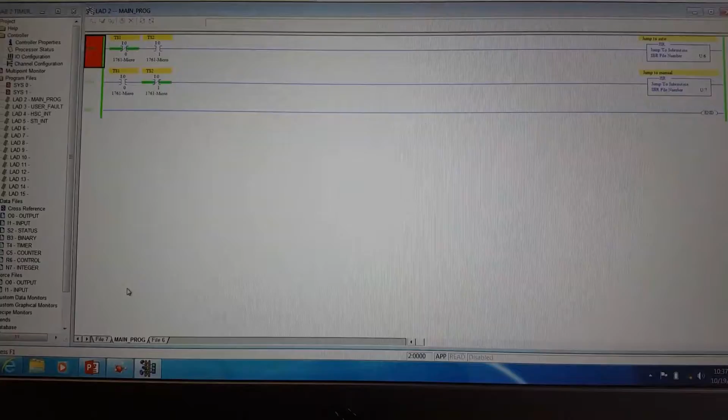So this is my program. This is the main file that basically, so there's two modes for this program. There's automatic mode and manual mode. And this file just tells the PLC which mode it should be operating in.

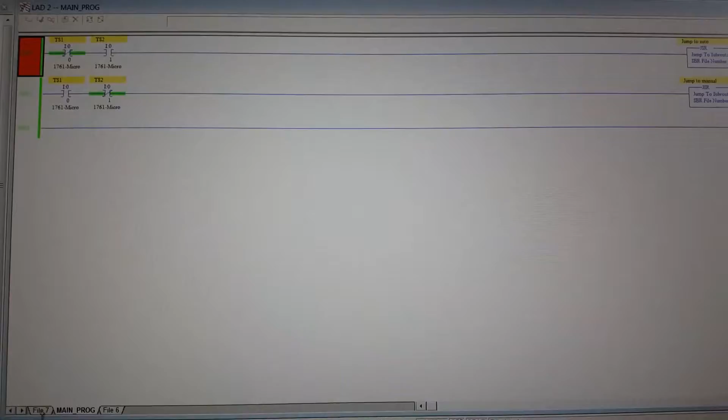So down here I have my tabs with my other two files, and this one is manual mode and this one is automatic mode. So when I go here and I turn on toggle switch 1, the program is going to automatically go into manual mode, and that means that when

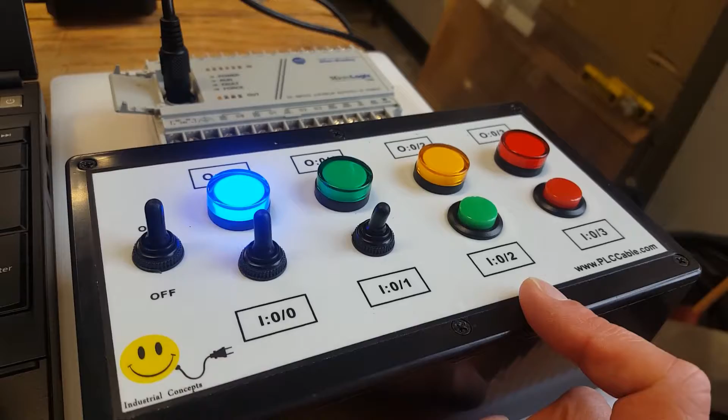the program is in manual mode, I have to push the green button for the light to advance to the next station. So this is simulating like a production line, and each light is a station on the line. So when I push the green button, it takes 5 seconds for the signal to travel to the next light.

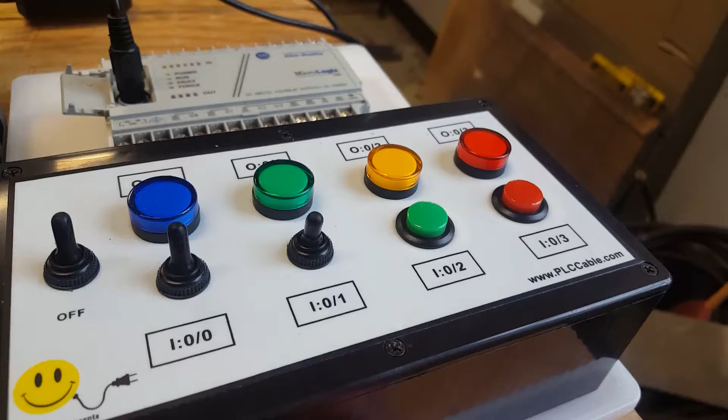And then I push it again, and it takes 5 seconds to go to the next one. And then I push it again, it takes 5 seconds to go to the last one. And when I push it again, it cycles back to the beginning. And it takes 5 seconds to go back to the blue light.

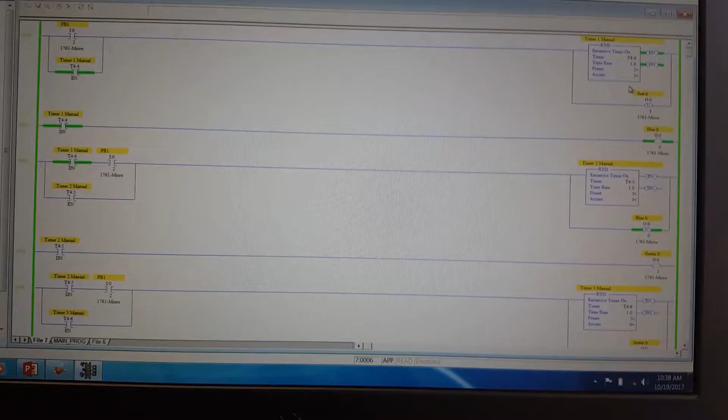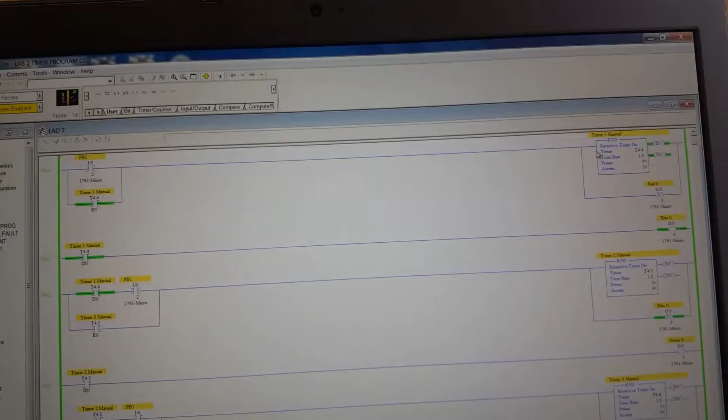So the way that this works is, here's my program here. I have timers, and each one is for 5 seconds, and each timer corresponds to one of the lights on my trainer. So for the first light, the only condition for it to come on is the push button, and that starts the first timer.

Now the reason it works with only the push button is because this is the first one, and it's not gonna reset to 0. So when I push the button each subsequent time, this timer will already have accumulated 5 seconds, so it won't go back to this one until I hit the button to turn off the red light, and that resets everything.

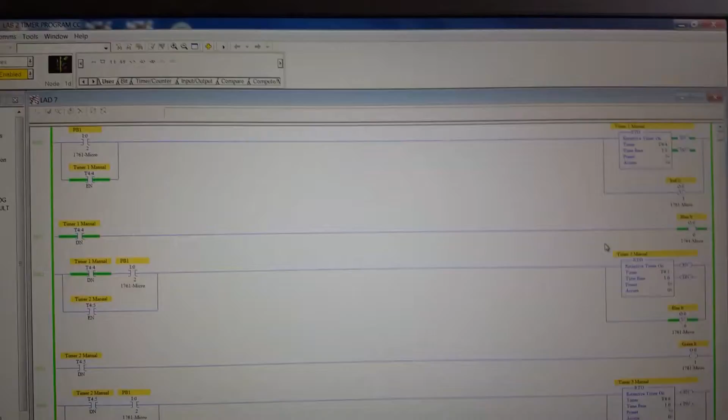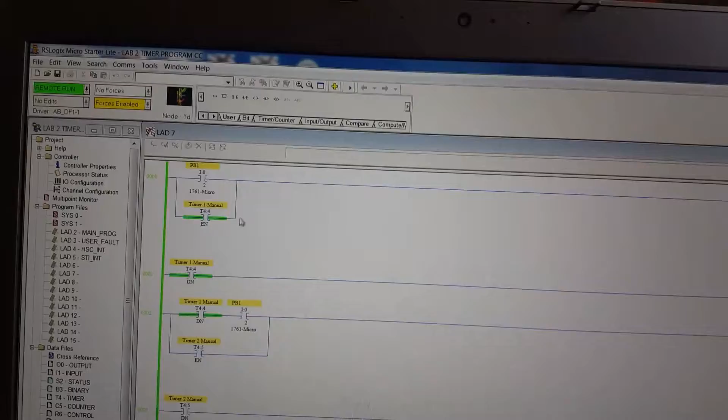So I have my push button 1, and the way that I keep this latched when I push the button, because I let go of the button almost immediately, but the timer keeps running, and that's because I'm using the timer as a latch. So once the timer is engaged, it latches itself on, and once it accumulates 5 seconds, it disengages, and this is no longer true. So that rung is no longer in operation.

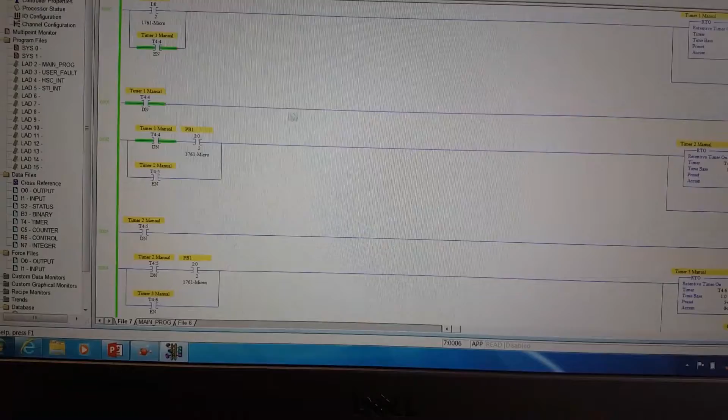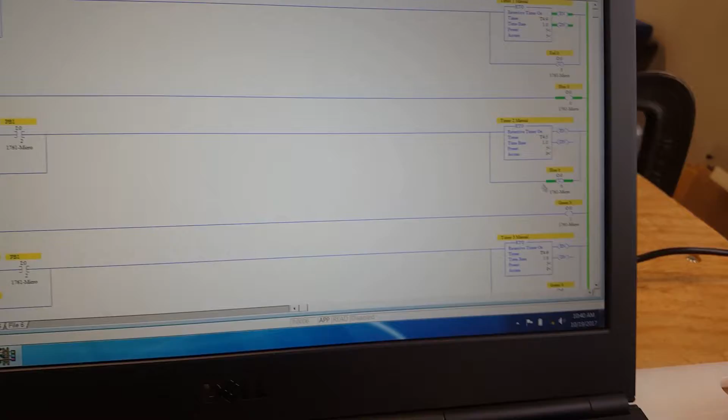And then after the timer disengages, this rung becomes true here, this input, and the output is the blue light. So the blue light comes on, and it'll stay lit as long as timer 1 is done, until I hit the button again, which makes these inputs true, and I have an unlatch for the blue light on this rung, and so on, and it goes that way through the program.

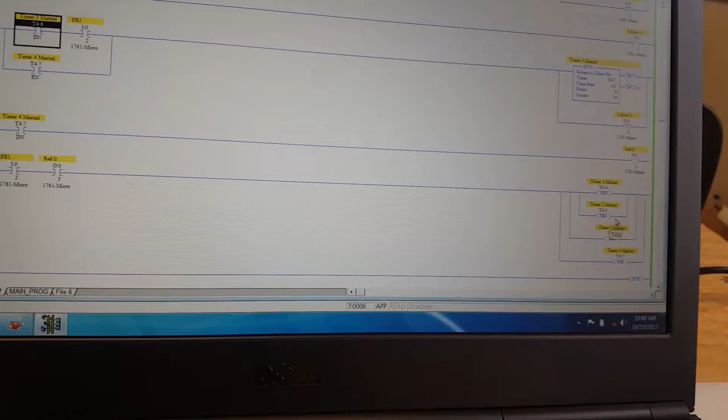And then at the end, I have a final rung with resets for all the timers. This is what I was just talking about. So when the red light is on and I push the button, it's going to reset all my timers over here, and it's going to cycle back to the beginning and start with the first timer again, because that one will be at 0, and so these conditions will be met. So that's my manual mode.

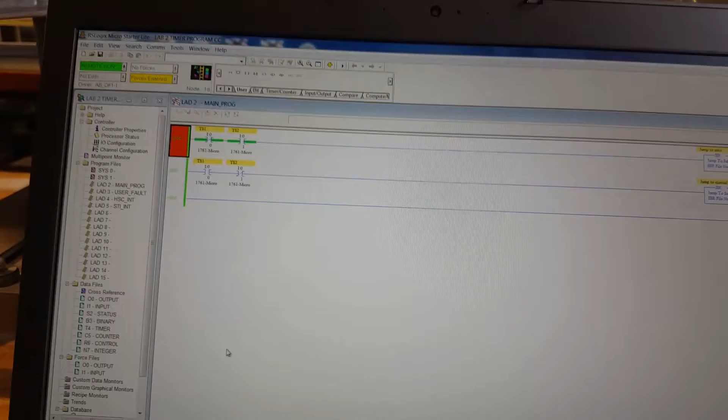And then for automatic mode, first of all, I'll go into my main program file and I'll show you. When I turn off this toggle switch and I turn on the second toggle switch, these conditions become true, and it jumps to subroutine file 6, which is my automatic mode file. And for this file, I have 4 timers, 1 for each light, similar to manual mode.

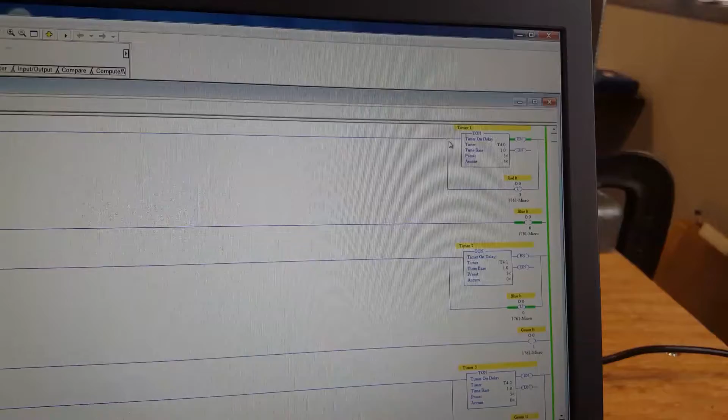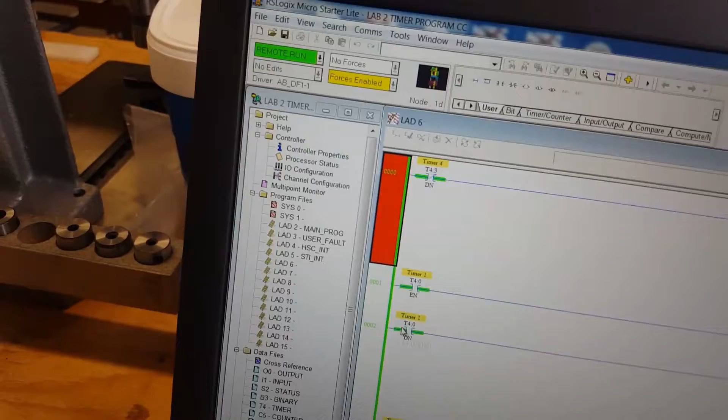But in this file, the timer counts to 5, and while it's engaged, you can see on the next rung, it's turning on the corresponding light. When it is no longer engaged, it becomes the condition for the next timer. So when timer 1 is disengaged, here it is right now, it's disengaged, and timer 2 is counting. Oh, that was quick. Now it's timer 3.

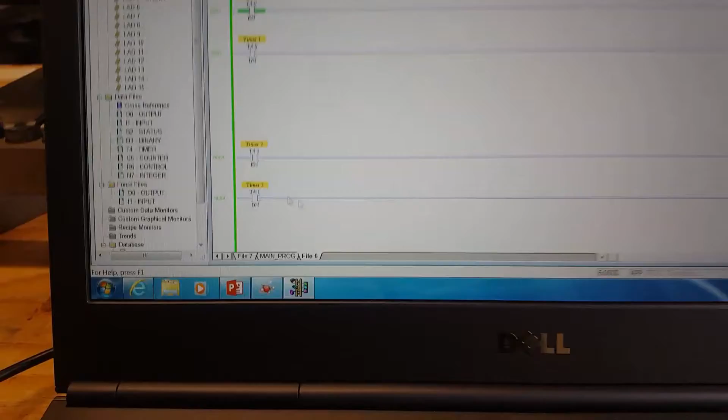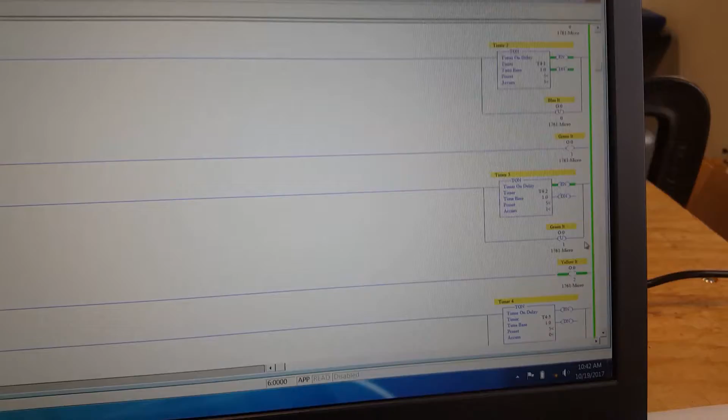But while timer 2 is engaged, the green light is on, and when it disengages, it turns on timer 3. And for each timer, I also have an unlatch for the previous light so that the lights don't stay on while they're cycling through. And here's my PLC trainer with the lights turning on in a sequence.

And the other thing I added to this program, as specified in our instructions, was a reset button, which is the red button. And when I push that button, it starts over at the beginning. So you have your blue light on, and it goes to the green light, and I hit the reset, and it goes back to the beginning of the cycle.

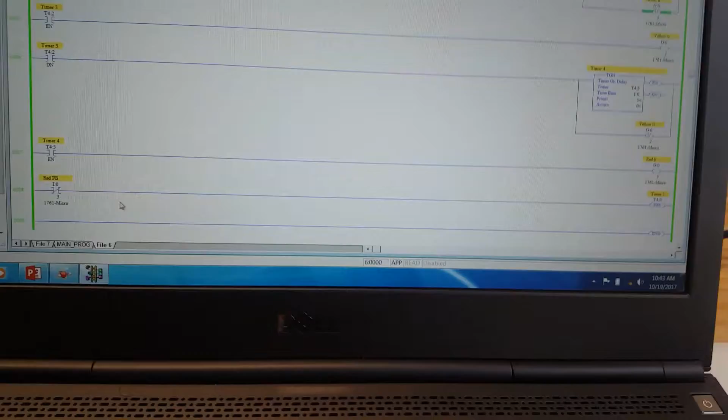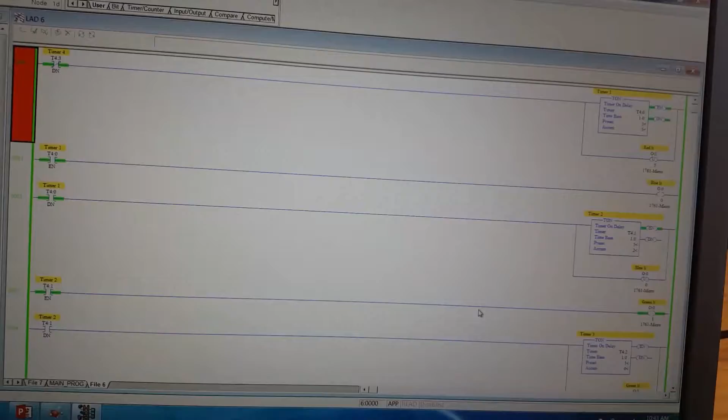And that is down at the bottom of my program. You can see I have an end push button here, and over here, timer 1 reset. And the output is a little reset here. And that just resets timer 1, so the program goes back to timer 1, and it starts over. And that is my production line simulation program.